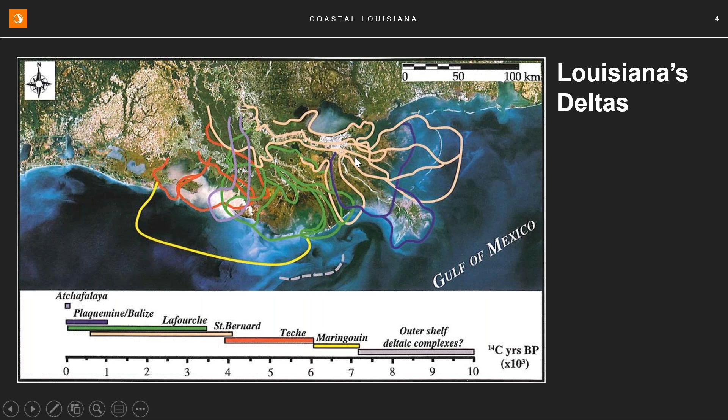We have a lot of our coastal landscape that has actually converted to open water. Remember this map—here's the mouth of the river, this is the Mississippi River, and this is the city of New Orleans. Remember this image for the rest of the talk, because once the Mississippi River no longer overflowed, we ended that after the flood of 1927.

What's really happened is that over the past 90 years, we've had continued compaction of the marsh sediments with no new addition of sediments on top. So what you see here is this devastating land loss we've experienced. In the last 90 years, we've lost about 1 million acres of contiguous wetlands converted to open water. This ecosystem collapse, I believe, is probably unmatched anywhere in the world.

And it threatens our communities and the way we live in coastal Louisiana, because think about how important all that land is if you have a hurricane surge. For the city of New Orleans, we historically had 30 miles of contiguous wetlands between the city and the open Gulf. Just remember this image as we go through our talk.

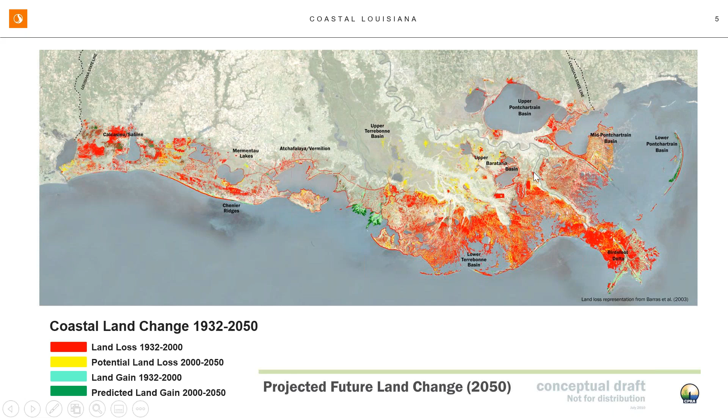Okay, so along comes Hurricane Katrina. But let me back up—I'm a native of coastal Louisiana, and being a native and an old guy, I lived through Hurricane Betsy in September of 1965. I was 11 years old at the time. I had always heard in my life that I had already lived through the storm of a lifetime. My mindset after that was that I'd already lived through the greatest storm I'm going to see in my lifetime.

I offer that because Hurricane Katrina changed everything. Where we thought we only had one of these storms in a lifetime, along comes Hurricane Katrina, nearly 40 years to the day from Hurricane Betsy. With Katrina, we had nearly 2,000 people killed and nearly $100 billion worth of damages. But Hurricane Betsy was a similar sized storm with a similar path, and we didn't have nearly the destruction, deaths, or losses that we had in Katrina.

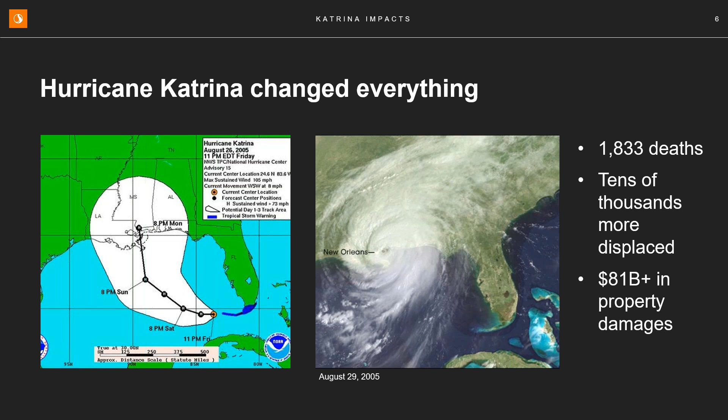Why was that? Remember that land loss map—during Betsy, we had those 30 miles of contiguous wetlands between the city and the Gulf. Look at this image—this is the city of New Orleans about a week after Hurricane Katrina hit. Winds for Katrina peaked at 175 miles an hour, and we had a 28-foot surge.

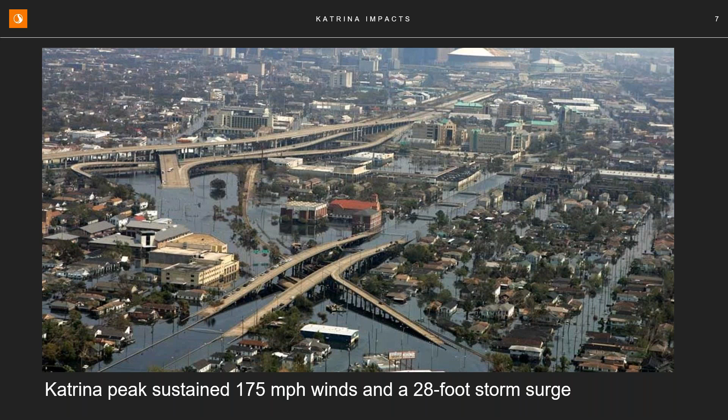But look at this—this is what my home looked like after Hurricane Katrina. So for everybody in the audience, think about what you would do if that was your home.

If you know anything about deltas, when a river overflows and builds a delta, the heaviest grain sediments are deposited closest to the river because they're heaviest. This means you end up having the highest elevation land closest to the river, which is what we have in New Orleans.

Again, these are some facts about Katrina. Recognize that this was truly a storm we'd never seen before. The path of the storm is such that the wind blows in a counterclockwise fashion. As it's coming on shore, it's blowing water from the Gulf into Lake Pontchartrain. Then when the eye passes, the direction of the winds is no longer from the south or east, it's from the north, and it takes all that water and pushes it back on the city of New Orleans. That's what caused the overtopping of the existing outfall canals, resulting in about 80% of the city being flooded. The 20% that did not flood was the old city, settled closest to the river at the highest elevations.

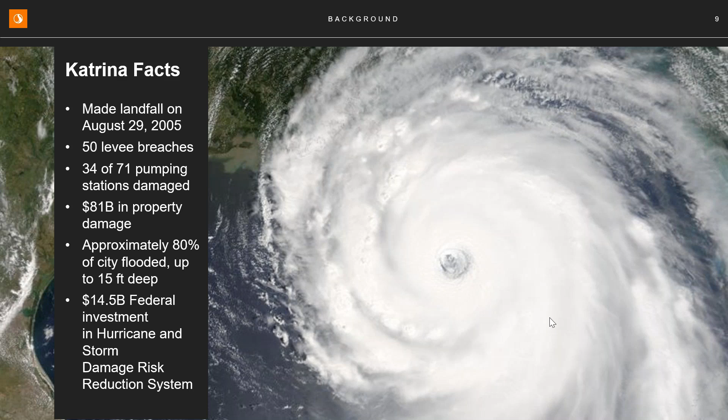Looking at this, my slide says 'this could never happen.' We have Hurricane Katrina come up through New Orleans and coastal Mississippi, taking out the entire east side of Louisiana. But then, lo and behold, 3 weeks later we have a very similar storm come up through Lake Charles, Louisiana, and Galveston up through Houston, taking out the western side of Louisiana. That had never happened before and could never happen again, right? Well, almost 3 years to the day, we had Hurricane Gustav take out the eastern side of the state, and 2 weeks later Hurricane Ike took out the western side, Galveston and Houston. So I offer that to say, if you think it can't happen because it's never happened before, believe me, it can, and probably it will.

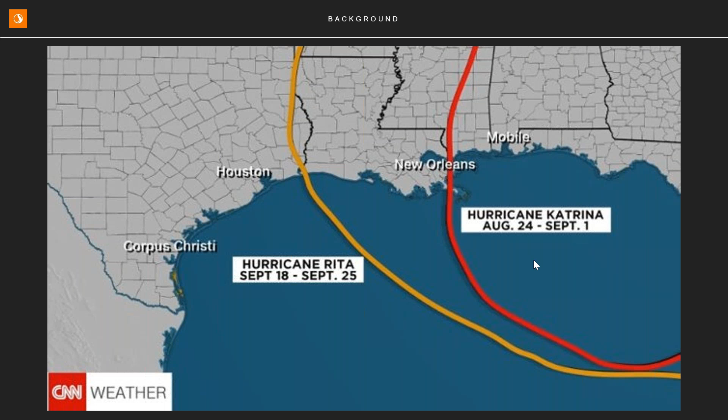Think about this - this was just our hurricane season last year. We had 8 named storms where coastal Louisiana at one point was in that cone of uncertainty. Out of those, probably our most devastating storm was Laura. It did cause a good bit of damage in coastal Louisiana.

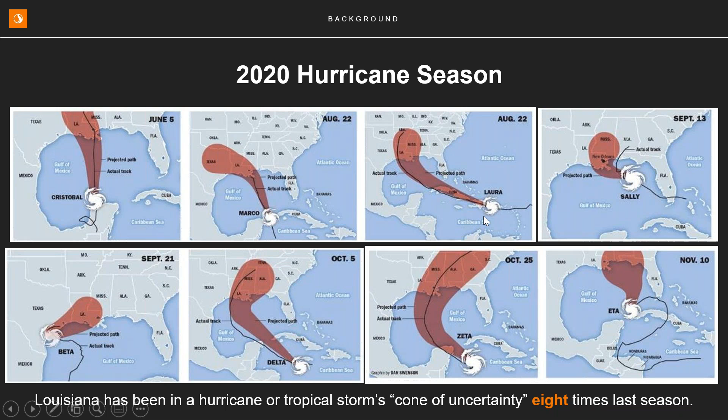So now we'll jump and talk a little bit about how the federal government responded post-Hurricane Katrina. We're very fortunate because of the emergency response, the Corps of Engineers was given a pot of money, about $15 billion, and they moved forward very quickly with upgrading our existing hurricane protection system. But after this, we realized you really can't protect a city from any size storm, so they changed the name and now call these the storm damage risk reduction systems. The Corps was very fortunate - we were very fortunate - they had money and they came in.

In the storm, the hurricane surge really overtopped the levee, and we had 50 different levee breaches. We had 34 of the city's 71 pump stations damaged. We had 169 miles of levees and flood walls that were compromised. And also during the storm, we had 14 inches of rainfall within a 24-hour period.

So what we've got in New Orleans now is really a greatly improved system that strengthened the levees, flood walls, gated structures, and pump stations. We also had several technically advanced engineering solutions implemented in this project. The first one, up here to the north and east, is the IHNC Lake Borgne surge barrier, created to stop the surge coming from the east. It provided great protection for the eastern portions of Orleans Parish and St. Bernard Parish. It was basically nearly a 2-mile barrier, the largest of its type in the world. It has 3 gated structures, and the top elevation of that barrier wall is plus 26 feet.

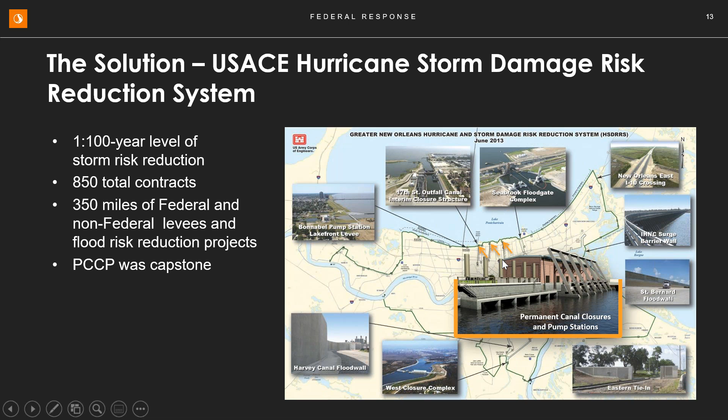Really, what I want to talk about is what happened in this area right here. And this is the project I was talking about. It's a permanent canal closures and pumps project, and I'll show you this map just to kind of see.

The pump stations are up here on the levee, but our major internal drainage stations, pumping stations, are down in this area. The reason is that historically, when these pump stations were built at the turn of the century — and I don't mean 2000, I mean 1900 — that was the edge of the city. So you had the pump stations, you had the internal drainage system, collecting all the water, and then it would just pump it into the swamps that historically existed between the city and Lake Pontchartrain. Well, over the past 120 years, we've grown out past, we developed out past those original pump stations all the way to the lake.

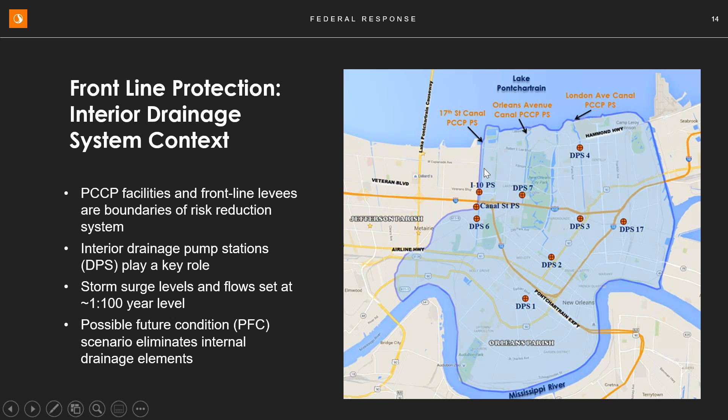And the way we responded was not by moving the pump stations to the lake, which was recommended actually by the Corps probably 40 years ago, but we built these long outfall canals. And these long outfall canals really what caused the problem, because you have pump stations inland, and then you have the large pump stations, and then they're open to Lake Pontchartrain. Hurricane surge pushes water down and overtops the flood walls, and that's what fills the city with water.

So these pump stations have a typical layout where we've got the bypass gates over here, and those remain open all the time, because under normal conditions, non-storm events, these stations are not functional. So we operate the way we always did: we have these long outfall canals, the internal pump stations, which are vintage 1900 pump stations, pump water into those canals, and by gravity it flows to the lake.

During storm events, you have to close those bypass gates and operate the pump stations. And because you expect that you're going to lose power during these storm events, you have to have your own generator building to provide that alternate source of power.

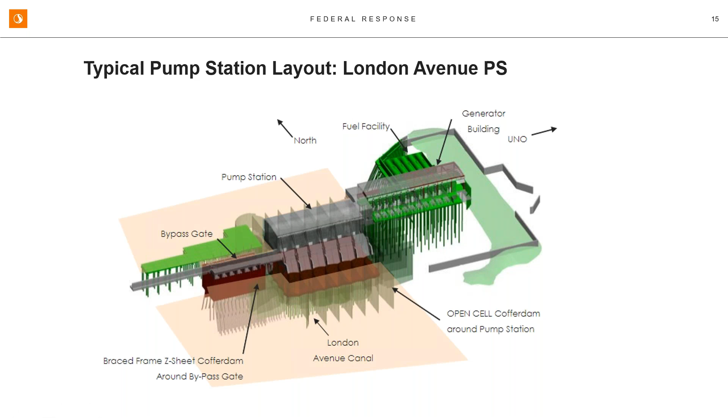So we'll look real quickly at all three of these pump stations. I'm going to show it to you real quickly, but realize that for all three of these pump stations, they have similar equipment. They have similar pumps, so that when it comes time for maintenance, it's not like each pump station has unique parts that have to be worked on.

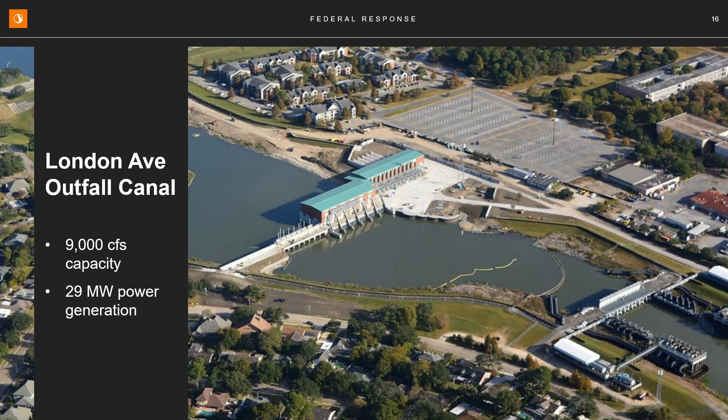The pump station to the east, the farthest one to the east, is London Avenue. It has a total capacity of about 9,000 cubic feet per second, which is a pretty good sized pump station. The one in the middle is Orleans, and Orleans is the smallest. It has a capacity of about 2,700 cubic feet per second, with 4 of the large generators and 3 of the large pumps.

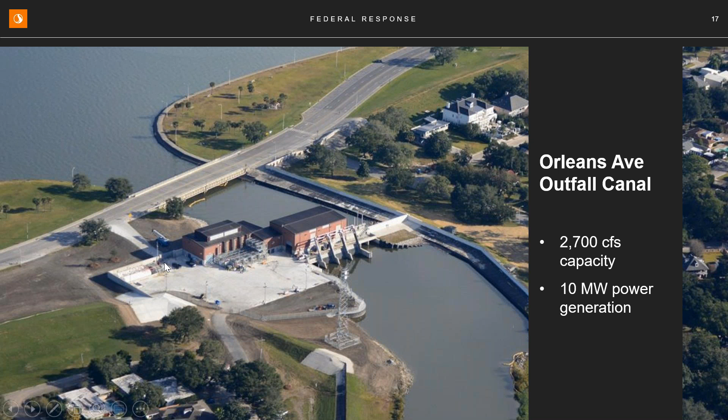And then the really large pump station is the one on the western side, the 17th Street Canal. The total pumping capacity of that plant is 12,600 cubic feet per second. It has 15 of these large generators, and it has 6 of these very large pumps.

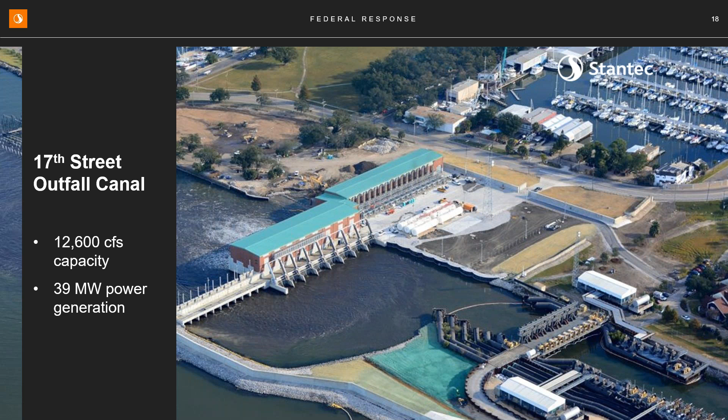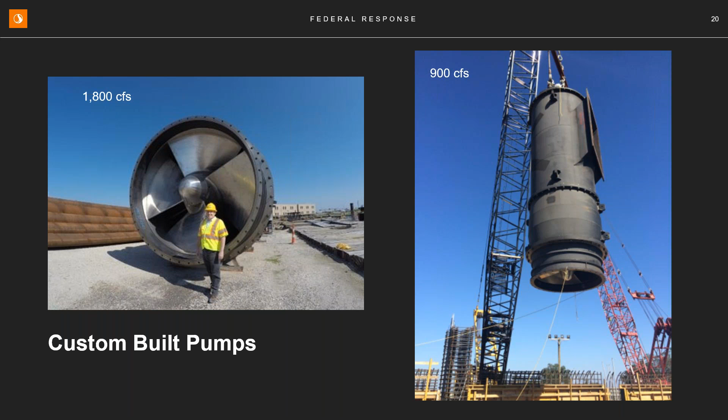This is the size of the vertical pumps. They're very large pumps — look at the size of the impeller here. This guy is John Take, and John is probably about 6'1", so that gives you an idea of how large this equipment really is.

So this whole project took only about 4 years from beginning to end, that is from the time you started to design to construction being complete on all 3 of these pump stations, for a total cost of about $731 million. So the federal government's in there, building all the hard structures that surround New Orleans.

So what is the state doing to help with this issue? Well, for the past 40 years, the state of Louisiana has known that we've had a land loss problem on a global scale, and we had begun to take action. We were taking action, but they were kind of small projects. And after Katrina, we really got serious about looking at the state and coming up with a comprehensive plan.

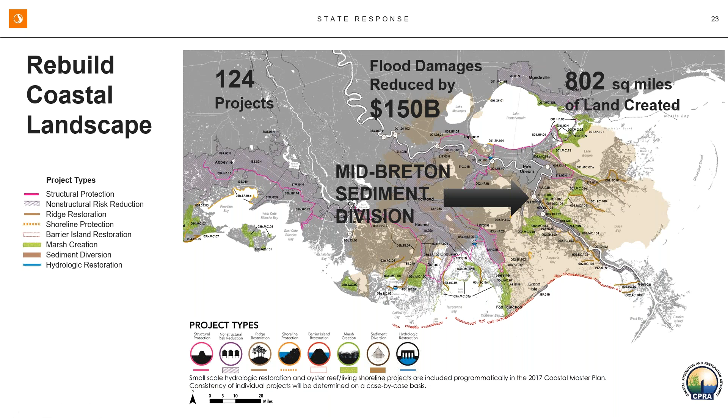If you look at the specific location here, the project is going to be located right here, and it's located here because of two things. One, you've got ample sediment in the river here—this is on an accreting point bar, so you'd be assured of a continuous, sustainable source of sediment to feed into the diversion. Also, it has the shortest distance to cross the federal levee and the local flood protection levee to reach the deteriorating wetlands. And you can see the city of New Orleans in the background—the whole idea is to rebuild this marsh area to provide protection to the city of New Orleans.

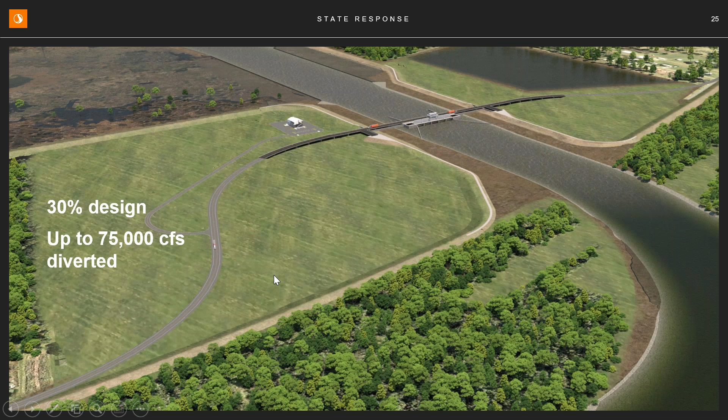This is a graphic of what the structure will look like. The structure will pass 75,000 CFS and will be operated when the river flows about 1 million cubic feet per second. To give you some idea, 1 million cubic feet per second is the beginning of flood stage on the Mississippi River.

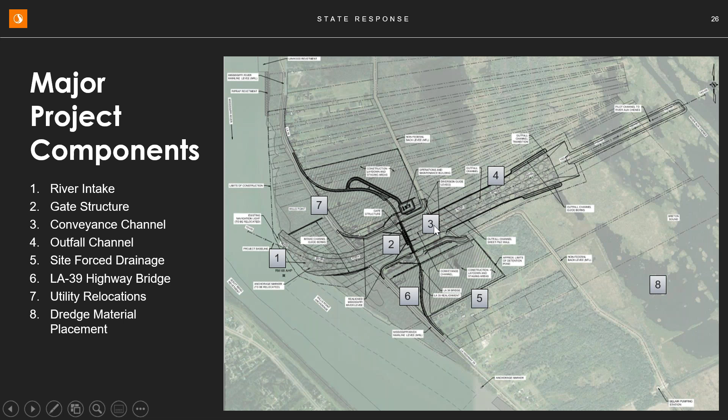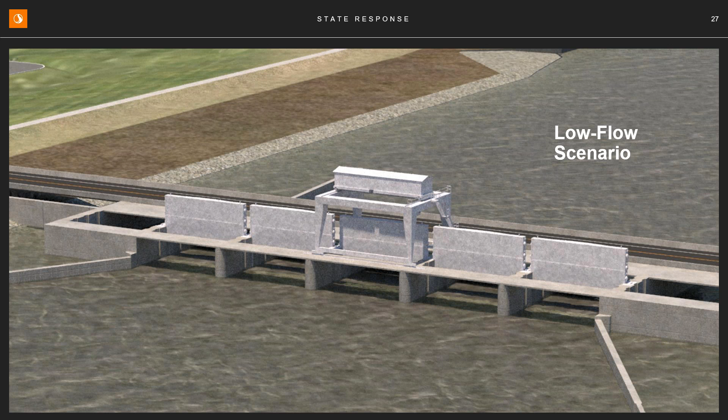The main components will be the river intake, then the gated structure, the conveyance channel, and then the outfall channel associated with it. The gates are currently being designed. The gate structure would consist of 5 vertical lift gates, each 48 feet wide with a base elevation of about -25. And then this is the receiving area that we talked about.

This is really important because this project is critical for near-term restoration, and it's expected to reestablish the natural deltaic process, reestablish critical habitat, and really improve our coastal risk reduction. The project is estimated to create or restore 50,000 acres over a 50-year period.

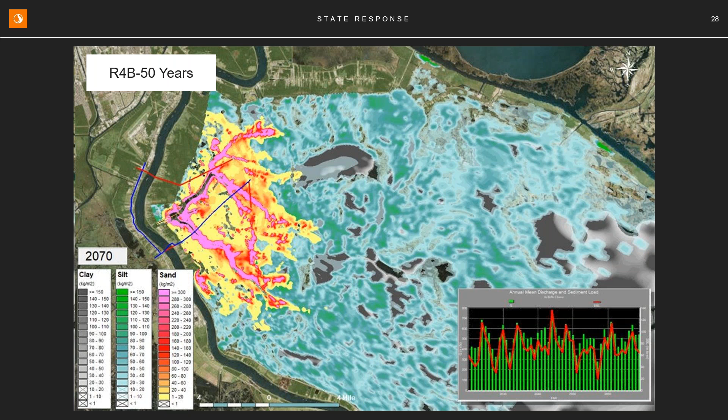Okay, and then lastly, we'll talk about how the city of New Orleans responded to Hurricane Katrina. I think this is one of the most exciting stories for me to tell as a resident of Louisiana. Recognize that before the storm, we had a lot of challenges, challenges that might be similar to your communities or where you're from. So if you are, you probably can relate to this.

We have the physical stressors. We have really high intensity storms. We have climate change. We have sea level rise. We have extreme heat in the city, and we have over 55 inches of rainfall a year.

And then we've got this, because of our soil types, these heavy clays. We have this shrink-swell soil, so we have a lot of subsidence and aging infrastructure that causes damage.

And then too, we had the social stressors. New Orleans is a place where we have high levels of poverty, unemployment, violence. We're always at health risk. Everything we do in New Orleans, we drink too much, we smoke too much, we eat everything we have, we deep fry, we don't get a lot of exercise.

So we've got all of these things that we have to accommodate, and we also live in this bowl, remember? The lowest elevation portions of the city are usually the least expensive land. So what happens is some of our low and mid-income neighborhoods happen to be located in these lower elevation parts of the city.

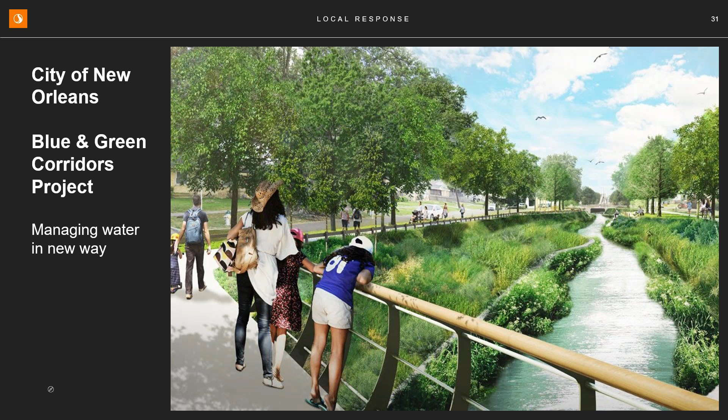And I say that just because before the storm, we wanted to pump water out as quickly as possible. And then after the storm, we realized that we can't accomplish that. So we have to think about water in a different way, and how do we manage water? And the Blue-Green projects were really the start of that. Okay, how do we do that?

So the existing conditions, like I said before, you look at New Orleans, you look at the lower elevation portions of the city, we have all kinds of issues. We have everything from the infrastructure. We have entire neighborhoods that are serviced by one pump station that has to rely on one pump station to drain a neighborhood.

We have all these problems with subsidence, and how you operate the pump stations. If you pump the water too low, then you have so much compaction, it causes all problems with your other infrastructure, whether it be wastewater or water infrastructure. And then our communities, to be perfectly honest, with this increased frequency of storms and intensity of storms, people got really, and they still are really, really tired of this repetitive flooding.

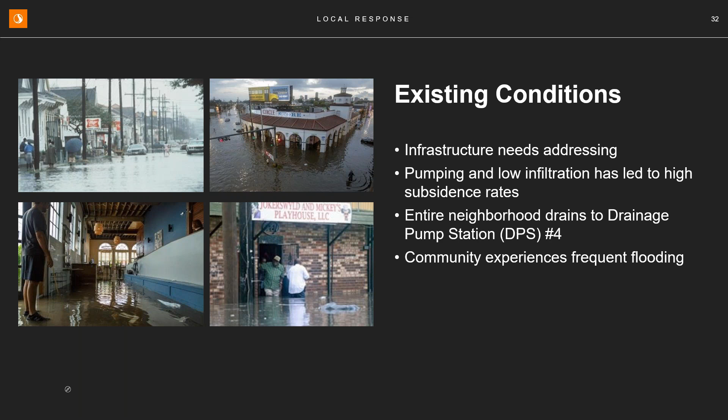So, part of our project, the very beginning of our project, had to do with a lot of engaging people about this new approach, this living with water approach, and this required a lot of focused community engagement, so that people really understood the benefits of not just flood mitigation, but all the amenities that could come along with this to improve your community and improve your quality of life.

And to find out what people really wanted, we didn't just schedule project meetings and have people come, but we actually reached out and went to neighborhood events and festivals and meetings, and even in some cases went to people's homes to sit down and talk about what could happen.

And this more engaging approach is something that is really required by any HUD funding which paid for this project. And we went out to the public and really tried to finalize our plans by talking with people one-on-one. So most of the people in New Orleans today, they do recognize that we can't just pump all the water out.

When they came to our meetings and understood what was possible, they came with very specific ideas about how to make their neighborhoods more resilient, more beautiful, and more livable. That's something that as a citizen your heart is warmed by — people really coming up with not just how do you get the water out of my neighborhood, but how do you make my neighborhood a better place. And what we heard was some of the things you would expect.

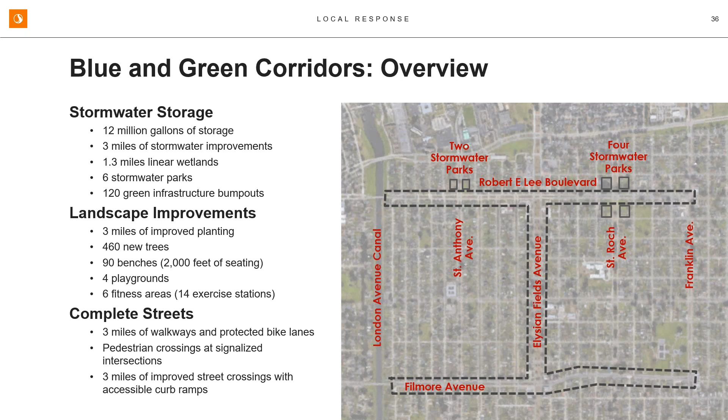So let's talk a little bit about this main concept, and that is water storage. If you come to New Orleans and talk to locals, we refer to the broad grassy area in the middle of an avenue or boulevard as the neutral ground, because historically in New Orleans, when our ethnic neighborhoods in uptown New Orleans were going to come together and trade, folks from the Italian neighborhood would never just go into the German neighborhood.

They had to have this neutral area that you could come to and visit and trade, and that was called neutral ground. In our case, the neutral ground was always built up higher than the street level, so when it rained, the rain hit the nice grassy area and ran off into the street, and you had to worry about that water going into the drainage system.

Well, one thing the Dutch thought is they came and said, you get this all backwards. You need to turn that upside down, and take those neutral grounds and make them depressed, lower elevation areas, so that during storm events they serve as a water storage area that can be collected and then slowly released to your drainage system, which is what we've done here.

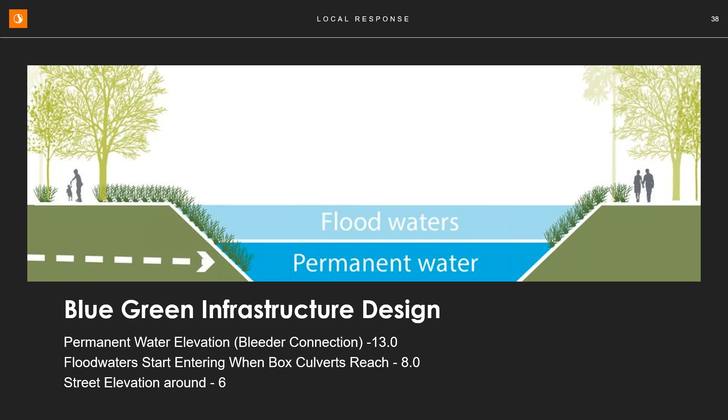This is a way of optimizing the operation of your pump station, but how do you make it better for the whole neighborhood? You can incorporate amenities like walking paths, bike paths, landscaping, and lighting. And then finally, this complete streets concept was something that was really embraced by the neighborhood.

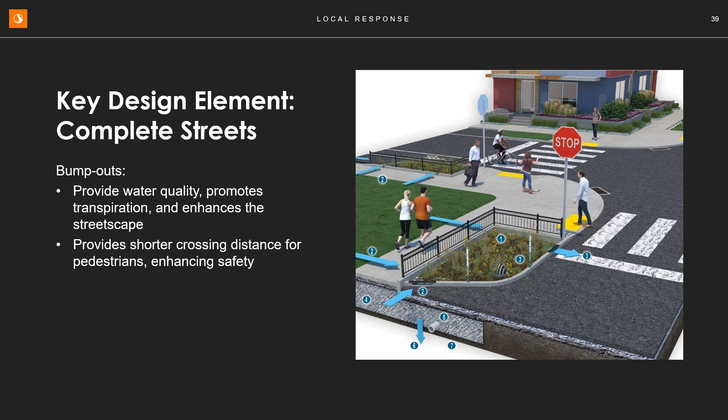People wanted to make crossing the streets safer for pedestrians, so we added bump outs, which cause slower traffic. They liked the connectivity between the neighborhoods for bike riders. So listening to what their needs were, it really enhanced these streetscapes, with rain gardens to store water, bump outs, and enhanced signage and markings. This is going to be a very highly visible improvement to the community.

We're almost at the end here. One last major thing with this project was a major intersection, and the city owned the four large lots adjacent to that intersection. The idea was taking those four lots and, under non-storm events, building recreation amenities for the community to gather. Then, when you do have a storm event, you have large areas that can store water and slowly release it to the collection system.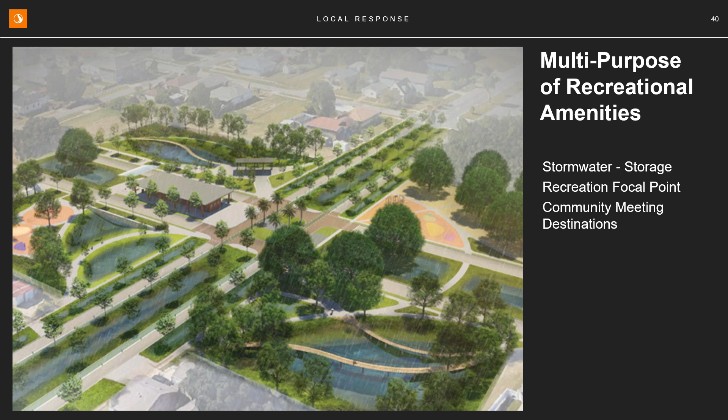This overall project is about 90% complete in the design phase, and we expect construction to start in the foreseeable future. Phase 3, which is the last one I just talked about, is probably at about 60% complete.

One good thing all communities can learn from this is that HUD funding does allow this complete analysis of benefits, and we work with AutoCase to calculate the environmental, social, and financial benefits of the project and compare them to overall project costs, including maintenance and everything else. The calculated benefit-cost ratio for this project was about 1.67.

So it's really important to you because HUD is going to have money that you can apply for from your community to do these types of projects, and just recognize that there are tremendous economic benefits for communities with this overall approach.

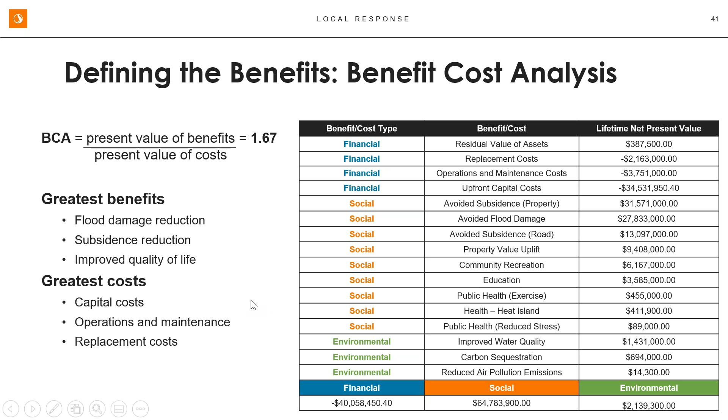So realize that, as you can see, resilience is not just one thing. It's really a layered approach that allows for the mix of both gray infrastructure and blue and green infrastructure to result in a more holistic solution. That's one approach we really want to stress here: all of our communities are different. We all have different social and environmental issues, but every community can identify their opportunities for the unique conditions they're faced with.

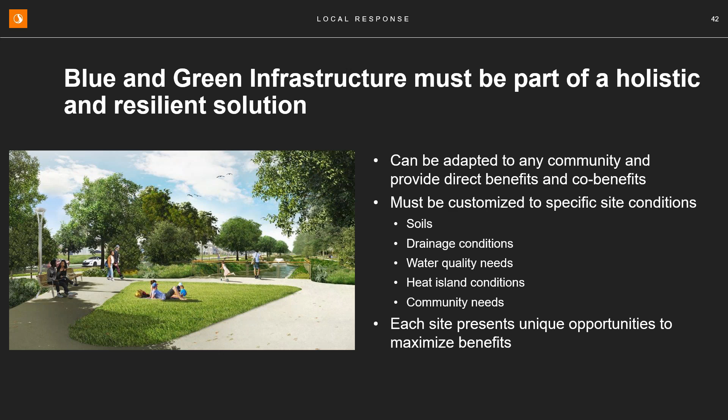In closing, I would just say that effective solutions really require all of us. A couple of things I hope you've gotten from this presentation: we all have multiple challenges, and we'll all embrace probably different solutions. But the combination of all of those projects really addresses this overall improved resiliency of our communities. I would suggest that we all stay focused on addressing the most urgent challenges and do it simultaneously from a federal, state, and local perspective.

You need to operate from the mindset that it could happen to me, and it could happen at any time. And it's not just us. I think this is something that is really around the country and around the world.

I think the goal for your community should be to prepare before the disaster. Don't wait until you've already suffered the loss of life and infrastructure damage that we did. Always remember that resilience is a layered approach. It takes all levels of government to achieve a holistic solution. Bottom line, it takes all of us at all levels of government and all types of infrastructure, hard and soft, to address the problem.